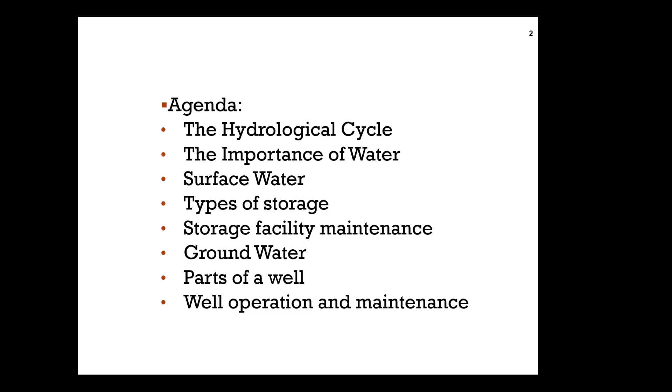And then I have a video as well on that, so hopefully that'll share okay, a short video. Then we'll talk a little bit about the difference between groundwater supplies and surface water supplies. And I'm actually not aware, depending on which system you are working in, whether they are surface water, lakes and reservoirs, streams and creeks, or if it's a well-based groundwater system. So we're going to talk about both as the distribution certification process covers off both, and the different requirements for storing the water and also moving that water from its primary location.

We're going to talk a little bit about primary storage, which is raw water, versus finished water storage, which is treated water moving into a steel tank or a concrete tank, or some of the older tanks were wood stave. Or I've seen some small water systems in BC that actually use children's swimming pools and hot tubs as their reservoir, because when you're pumping from a source, you don't want that well or jet pump to be running all the time, so you pump into storage.

And people have been very creative about using any large vessel as a storage vessel for finished water. The trick is, of course, to make sure that it's safe, that it's disinfected and fit for consumption, and also that it provides the supply that you need, whether it's for domestic or outside use, or potentially for fire protection. So we'll cover that off and then look at parts of a well, how a well operates, and some of the tricks around maintaining that. And again, one eye always on

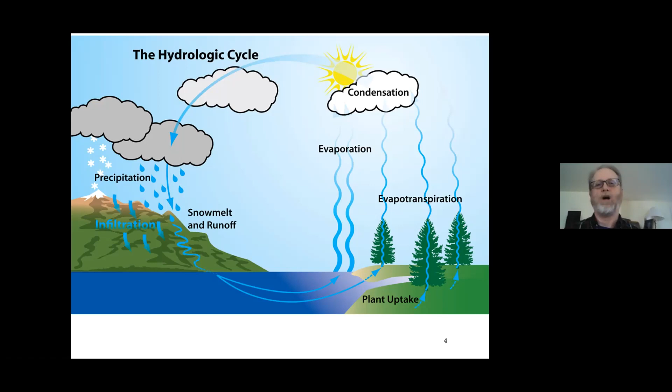When it hits the surface of the earth, it then either can act as runoff through snowmelt or direct from impact onto the earth, runoff on the surface into a source, or it can infiltrate or percolate into the soil and then recharge our groundwater aquifers. So this cycle and these stages of water are always happening. It's either winter in half the world, the northern hemisphere, or vice versa. So the process of water falling back to Earth could be in a solid. The northern hemisphere right now is basically in winter, so that's what we're seeing in a lot of places. And again, we don't get very even distribution of fresh water in our system.

So what we're looking at is a cycle, and the important points to remember: it doesn't have a beginning or an end. It is basically, as they say, a perennial in-motion series of changes to fresh water in our system. And of course, it can take water from saltwater bodies as well and put it back into the atmosphere, either through direct evaporation or through wind action across the top of the bodies of water, and then eventually back to Earth again.

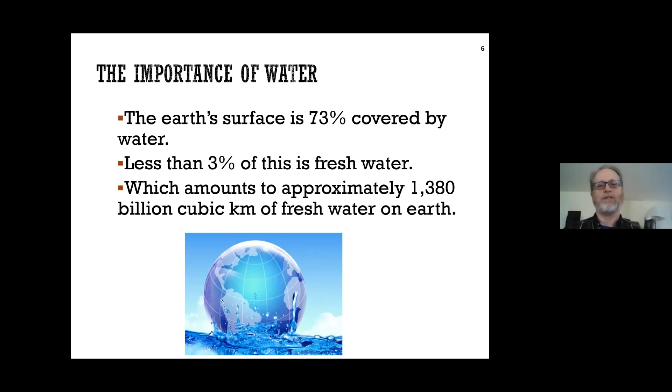So be familiar with the terms, you know, the precipitation, transpiration, infiltration, and so on. Basic facts: 73% of the Earth's surface is water, but less than 3% of that is fresh water. And of course, that's a fixed amount. And as you know, and are probably keenly aware of in some of your water systems, not necessarily fairly or equitably distributed.

In North America, and it'd be interesting to compare that with your associations to see where consumption is. But BC, the province I live in, has one of the highest per capita water uses of over 375. It's actually gone down. About 5 years ago, it was well over 400 liters per person every day. Now, they're not drinking that much water, but when you break down where water use is happening in BC,

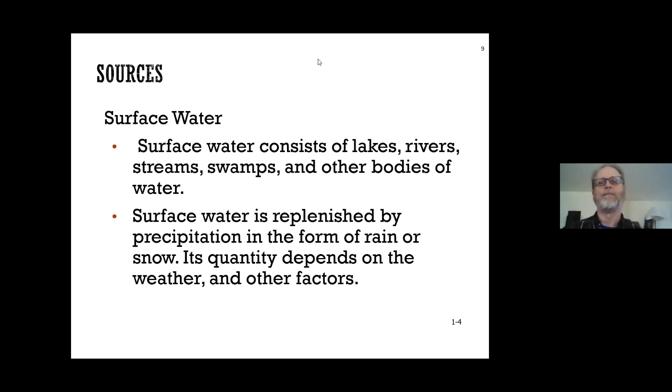And I think this is a good time to show, I've got a short video on the hydrological cycle. So let's try and show you that. Let's just tee it up, make sure it's ready to go. Yeah, this is from one of the environmental sciences groups. So let's try that, and hopefully it will work; holler or send me something through chat if you can't hear this properly.

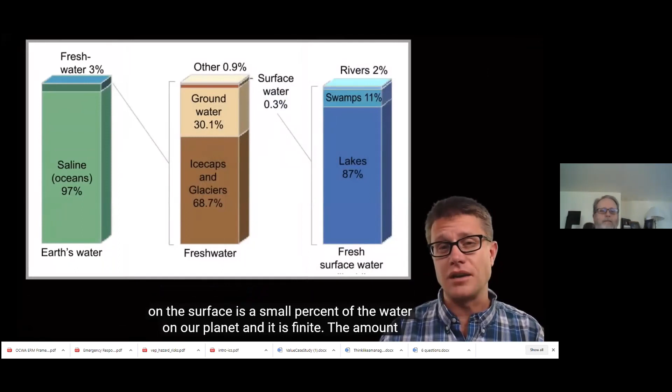Hi, it's Mr. Anderson, and this is Environmental Science Video 5. It's on water resources. Our body is filled with over 60% water, and this doesn't seem like a big deal because the Earth is covered with over 70% water. The problem with that is that most of that is seawater that we can't use. And the fresh water that remains, most of it's going to be frozen in ice caps and glaciers. And so the percent that is really fresh water on the surface is a small percent of the water on our planet, and it's finite. The amount of water we have on our planet has never changed. Now, as the sun provides energy to the earth, the water will move around through the hydrologic or the water cycle, but we have a finite amount of water, and most of it is going to be seawater. We have a little bit of fresh water. The seawater moves around through ocean currents.

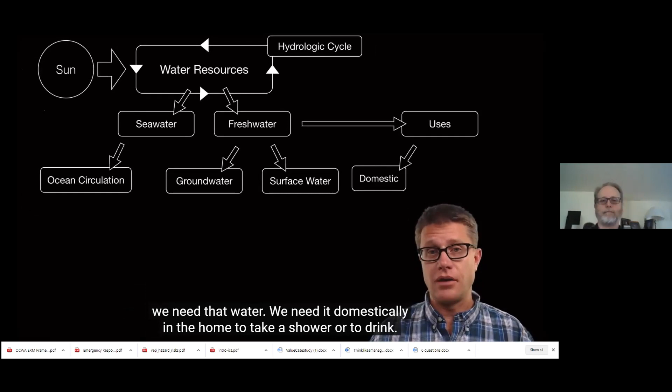The fresh water could be divided into groundwater, water underneath the surface, and then surface water, which is on the surface. Now, we need that water. We need it domestically in the home to take a shower or to drink, but we also need it in industry to make our goods, and most of it actually goes to agriculture to make the food that we eat.

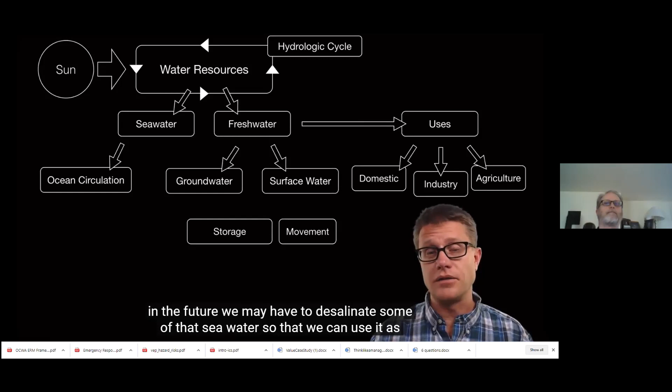The problem with water on our planet is that it's unevenly distributed. In some areas there's lots of water, in some areas, however, there's going to be scarcity. And so humans have had to learn how to store water, move it around, and in the future we may have to desalinate some of that seawater so that we can use it as fresh water.

Now, where is that groundwater stored? It's underneath the ground in aquifers that we can deplete. What about the surface water? Well, it can be stored in reservoirs that occur naturally or ones that are created as we produce dams. And then we can move it around through aqueducts and even to the plant itself through irrigation.

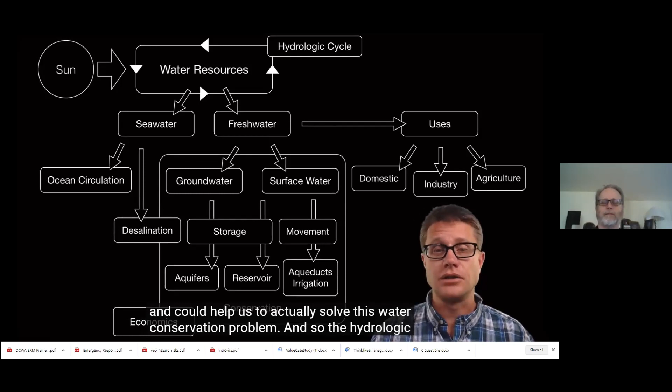But we have a finite amount, and so conservation is incredibly important, and economics have contributed to water loss and could help us to actually solve this water conservation problem. And so the hydrologic cycle works like this. Anywhere there's water on the surface, we can have evaporation. That gets cooled and eventually leads to condensation and precipitation.

Once it's on the surface, we call that surface water. It's running over the surface. That could be lakes and swamps and rivers. After we have that water hit the ground, it can, however, be infiltrated into the soil and the ground itself.

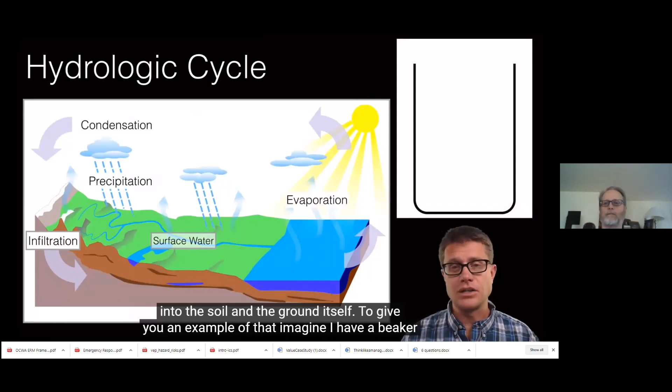To give you an example of that, imagine I've got a beaker here. Is it full? Well, maybe full of air. If I put marbles in it, is it full? No, you can still see there's spaces in it. What if I fill it up with sand? Is it full? No, there's still spaces in there. If I fill it up with water, now we're starting to fill up that beaker. And that's what infiltration is.

As the water flows down into the soil, we call that now groundwater. Let's say it's not filling that whole beaker, it's right here. That point at which we have saturation in the groundwater is called the water table.

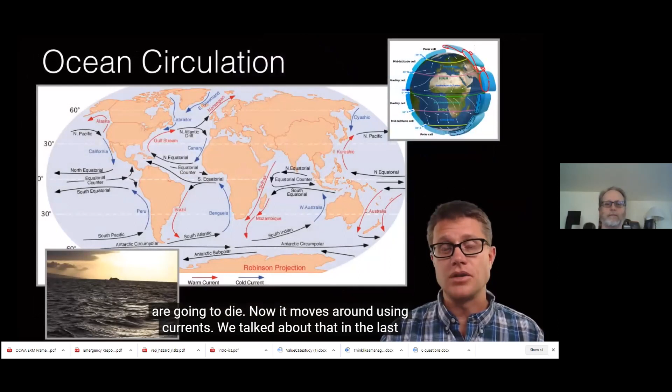Most of our planet is covered with water. Unfortunately, it's seawater. It has salt dissolved in it. If you drink it, you'll die. If we put it on our fields, the crops are going to die. Now, it moves around using currents. We talked about that in the last video on the atmosphere. It's cells in the atmosphere and the Coriolis effect.

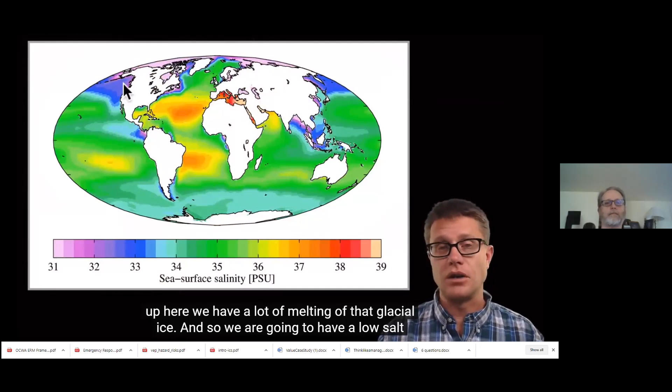So we have these general trends in circulation, but also salinity affects it. And so if we look at an area right here, it's a high salt concentration because we have a lot of evaporation. But up here, we have a lot of melting of that glacial ice, and so we're going to have a low salt concentration. And so the salt concentration and differences in heat create this thermohaline circulation that really makes that whole ocean on our planet one system.

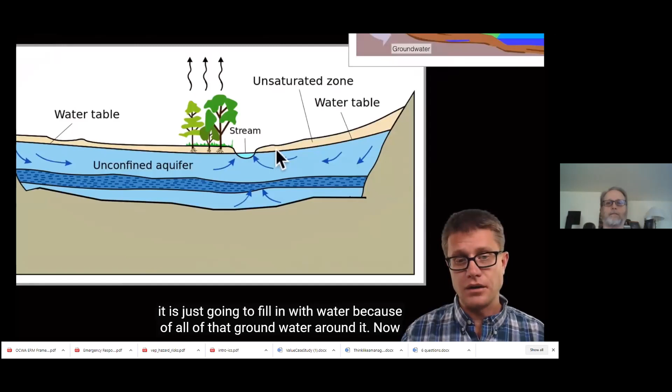Now, if we look at fresh water, it can be divided into water that is above the surface, we call that surface water, and then groundwater. But what's interesting is if we look to the sides of that stream, you can see the water table in the groundwater. And so if you dig a hole right here, it's just going to fill in with water because of all that groundwater around it.

Now, this is an aquifer. It's storage of that water in the groundwater. We call this an unconfined aquifer because the water can move between the surface and the aquifer itself. So this is on every certification exam, to be able to define an unconfined aquifer as opposed to an aquifer that's confined by the composition of the soil.

But it's a good cross-section of seeing where the water table, or that top water level, is in our groundwater supply and how it can turn into surface water based on the contours and configurations and elevation changes. If I were to dig down a little bit, we could find what's called a confined aquifer, and that's going to be stuck between this impermeable rock down here and above it.

Now, let's say we want to get to that groundwater on the surface. If we want some of the surface water, we simply pump it out of the stream, but if we want to get it out of that groundwater, we could dig a well. Now we could either pump out the water, or sometimes we'll have what's called an artesian well, where there's either enough gravity above it or enough pressure in the groundwater so it actually comes out.

But as we use that well, just like using a stream, the water table is going to drop, and so we're going to start to deplete that aquifer. Now, an important term in filling an aquifer is something called recharge. So as we get water and infiltration, we're going to fill up that aquifer, but if the outputs, in other words, if we pull out more water than we're putting in, we're going to deplete the aquifer.

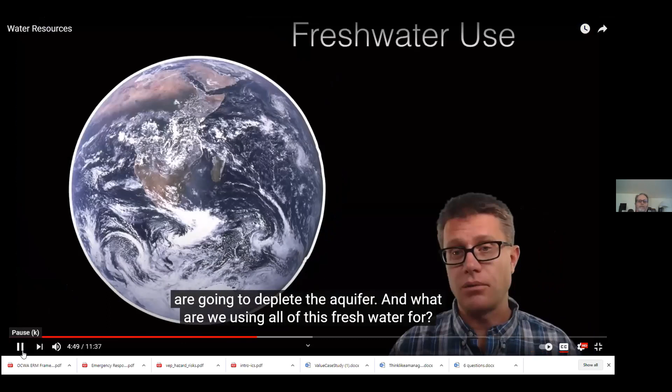And what are we using all this fresh water for? Well, if we break it out using a pie chart, most of it is actually for agriculture, the growing of our food. We use some of it for industry, and then some of it domestically in the house. The problem, again, is that it's unevenly distributed on our planet. Brazil's going to have plenty of water, but if we look in the desert southwest of the US or in the Sahara, there's not going to be any water right there.

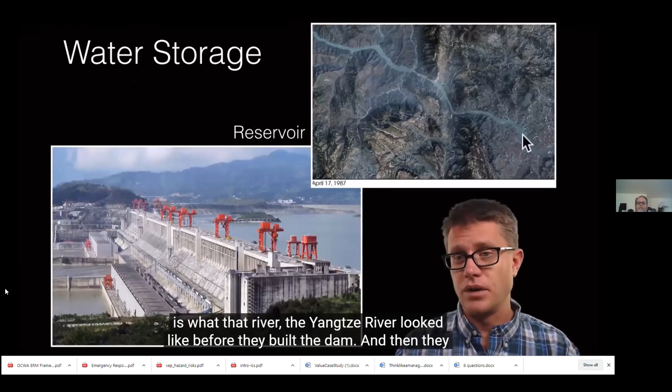And so what have humans done? We've started to store water. So reservoirs are an example of that. A big example would be the Three Gorges Dam that was built in China, finished in 2006. And so this is what that river, the Yangtze River, looked like before they built the dam. And then they built the dam, it finished in 2006. You can see what it looks like then. So we're storing the water behind the dam.

What's nice about that? Now we have water that we can use at will. We also can get energy from it as we run that water through a generator. We can control flooding downstream, and also we can use that for irrigation, or at the Three Gorges Dam they're using it to increase shipping on the Yangtze River. So it sounds great. What's the problem?

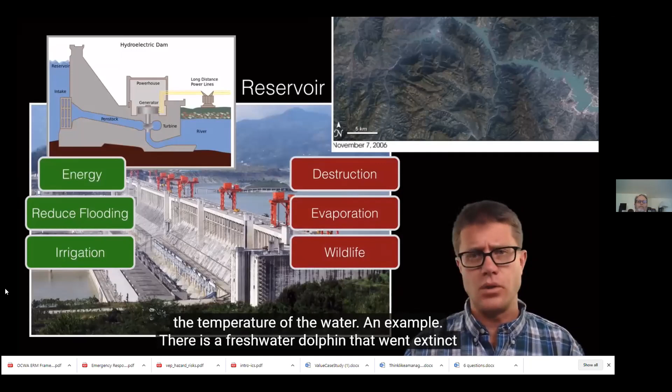Well, there's going to be destruction wherever that water went. So we're decreasing 20% of the forest in this Yangtze River. We're displacing over 1 million people that used to live there. We also have evaporation of the water off the surface, and then we're going to have nutrients that start to deposit there that would have normally moved their way down the river, and that's going to disrupt wildlife. And so fish obviously can't spawn, move up and down in the stream, but it's also going to change the temperature of the water. For example, there's a freshwater dolphin that went extinct in the Yangtze River, and the Three Gorges Dam may have contributed to that.

We can also store it underground. That's naturally stored in what are called aquifers. One of the largest ones on the planet is the Ogallala Aquifer. It's going to be found in the Midwest, and so here it is in Nebraska, but it goes all the way down to Texas and up into South Dakota. It's a huge aquifer. So if we look at the amount of water stored underground, it's over 1,000 feet of infiltrated, saturated water underneath the ground that we can use. And you can see right here, there's tons of irrigation going on. This is in Kansas. They're using center pivot irrigation so they can grow their crops.

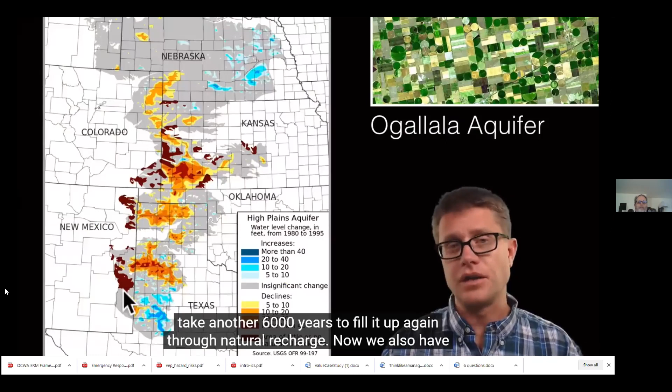Seems great, but what happens again is that we can deplete that. So if we look at this, this is during a 10 or a 15-year period of time. There's an increase in the aquifer in certain areas, but most of the time we're seeing depletion. And sometimes that aquifer has kind of disappeared. And a lot of scientists think in the next 100 years, the Ogallala aquifer is just going to disappear. Why is that a problem? It could take another 6,000 years to fill it up again through natural recharge.

Now we also have to move water around. So looking to California is a great example of that. So if we look in California, they need a lot of water in the Central Valley and then in the south, Los Angeles and San Diego. So they built this huge system where they can move water where it is in the mountains, and they can move it through these aqueducts to where it's needed.

Now you can see that's controversial. So people in this area are saying you're depleting our rivers. In this area, they're saying we have more population, we're growing your food, so we need more of that water. And this conversation becomes more heightened when we move into drought, and California is in an awful drought right now. Drought occurs when you receive way less than the normal amount of water. And so as we use that for agriculture, irrigation movement is super important. So how do we move the water actually to the plant? The easiest way to do that is using furrow irrigation.

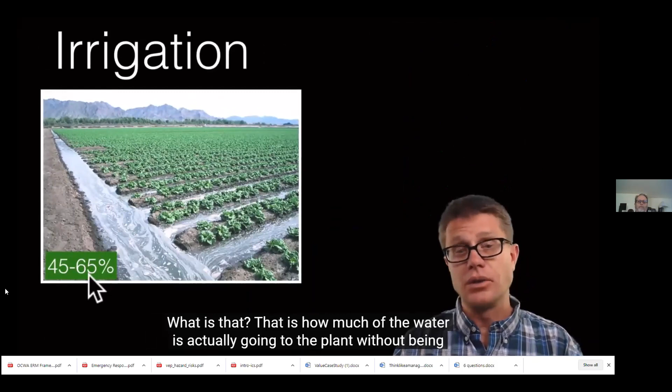You can see it's easy, you just dig a trench. What's the problem? We have efficiency rates of around 60%. What's that? It's how much of the water is actually going to the plant without being evaporated and infiltrated into the soil. So we could move to flood irrigation, higher efficiency, but it's going to damage the plant a lot of the time. We could move towards a spray irrigation, high efficiency, but what are we doing?

You can see we're adding equipment. This is a center pivot, so that costs money. Or we could move to drip irrigation. You can see it's going to be 95% efficient, but it's going to cost the farmer a lot more money to do that kind of irrigation.

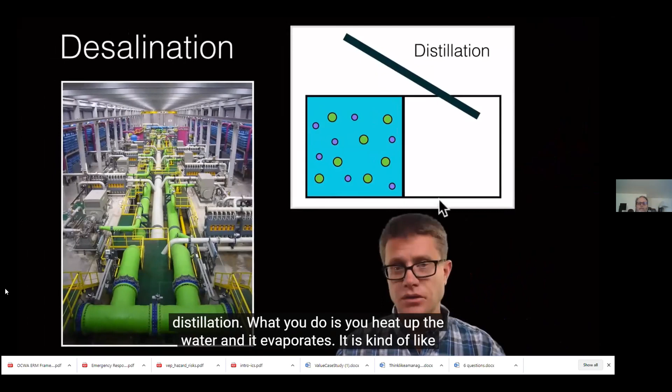As we move into drought situations, desalination becomes an option. We can remove the water from seawater. One way to do this is through distillation. What you do is you heat up the water and it evaporates. It's kind of like the hydrologic cycle. You then cool it down, usually through pipes, and what you do is you remove the water. What's the problem? Costs a huge amount of money.

We could also do that through reverse osmosis. This is a reverse osmosis plant over on the side. What you do is you put a membrane right here, and then we squeeze the water, and as you squeeze the water, you move the water through, but you leave the salts behind. Now we have fresh water. What's the problem? Costs a lot of money.

About 1% of the people on our planet are using water that's created through desalination, but by 2025 we should have 14% of the people on our planet in water scarcity, and so desalination may be an issue. Now how did we get to this problem? It seems like we have an unlimited amount of water, and remember our model that the earth provides the life support for society and the economy on the inside, and so the economy got us to this point. The decisions that we as governments made got us to this point.

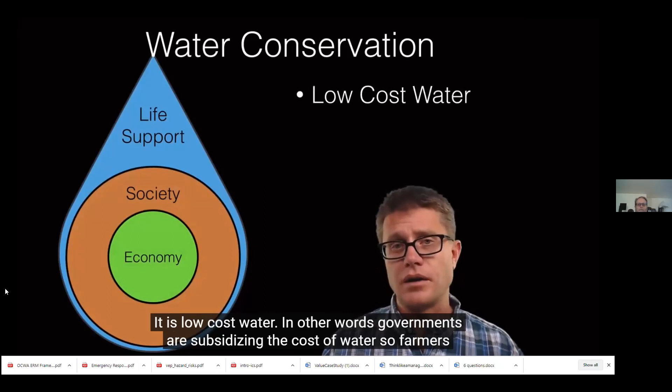Where's the big mistake we made? Well, water doesn't cost enough. It's low-cost water. In other words, governments are subsidizing the cost of water, so farmers and industry and you are not really paying the amount that water costs. And as a result, you're not going to conserve it because it's just pennies on the gallon. It's incredibly cheap. And so how could we solve this problem?

People might not like it, but if we increase the price of water, people are going to start to conserve. And we can also use incentives. In other words, we can pay people, pay farmers, for example, to use irrigation that's going to be more efficient or to conserve water. That's another way that economics can start to solve this problem of water conservation.

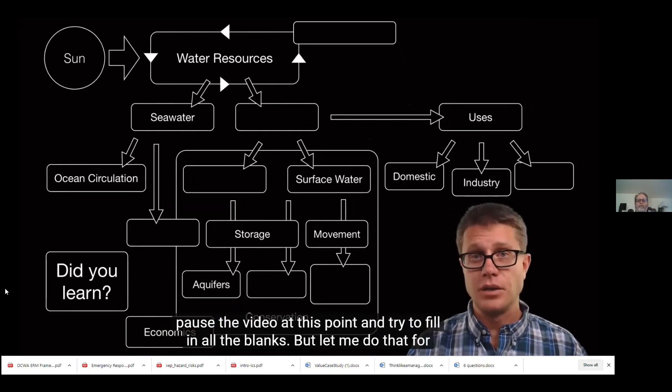And so did you learn the following? I would pause the video at this point and try to fill in all the blanks. But let me do that for you. Remember, the water resources move through the hydrologic cycle. We've got seawater, we've got fresh water. Ocean circulation and desalination could help us solve this problem. The fresh water can be groundwater or surface water.

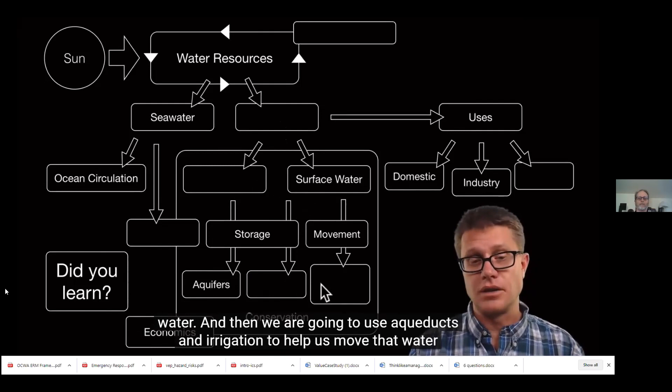We use it for domestic, industry and agriculture. We can store the surface water through reservoirs. Aquifers is groundwater. And then we're going to use aqueducts and irrigation to help us move that water around. But again, conservation is incredibly important. Economics are going to drive that. And I hope that was helpful.

All right. So several of the points that we talked about already in terms of both the hydrologic cycle and how we move the limited resources we have. And it's interesting because California the last couple of years kind of came out of a drought for a while, but in the big picture, of course, the issue is that they've had to change to some different modes of growing crops because some of the crops, especially almonds and avocados, are very water intensive.

So they've changed that. And it's one thing for a government to say, we're going to raise your water rates. In BC, we had a report done by the BC Water and Waste Association a little while ago on the actual cost. Are water utilities charging enough to actually pay for the infrastructure? So never mind the water itself, the product. We're just talking about packaging. And the answer is no. So we're not even charging people enough to upgrade the infrastructure.

And you may have your utilities in similar situations where pipe is aging, pumps, motors, valves need replacement, and there isn't sufficient budget for that. So, of course, metering helps.

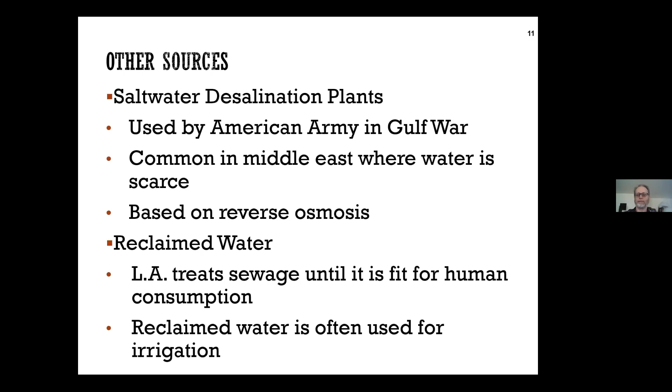With surface runoff, if we're collecting water for our system from the surface, then the things that engineers and system designers have to consider are: when does the water show up? How intense is it? And that intensity is how much water comes in, say, a 30-minute period of a storm. Precipitation happens for 30 minutes.

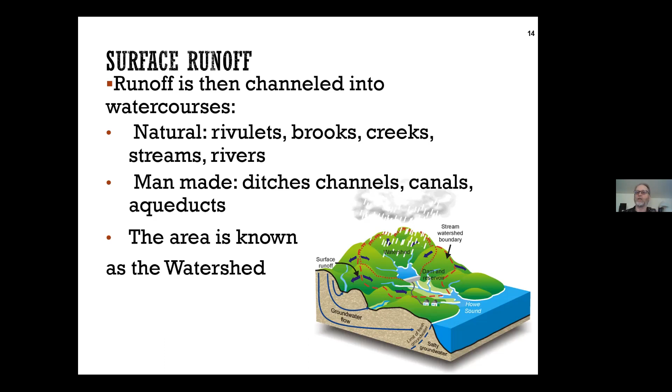So, as systems grow, they adapt to those environments. But it's also about knowing, well, where are the surface water supplies in the first place? So we can use the surface water either to feed natural lakes and ponds, or we build reservoirs. That example in the video of the Three Gorges in China, the dam was built to create what's called an impoundment area, but basically impounded water just means we've locked up a specific volume of water to supply

whatever our needs are. In BC, there's a big dam being built up in the north called Site C, mostly for hydroelectric. But some of the concerns environmentally were, you build a dam on the river and you impound the water behind it, it's going to have an environmental impact. It's going to affect people's livelihoods if they fished or hunted in the area or lived in the area. Affects logging, affects all sorts of things. So usually dams are built with very careful consideration about what the impacts are going to be.

A lot of surface water supplies are also what we call mixed use, that they may be a supply for people's drinking water, but they're also recreational. The biggest recreational lake in BC is a lake called Okanagan Lake, in the southern half of the middle of the province. And all of the communities ringing the lake use that surface water for their drinking water. They either take it from a creek on its way to the lake, or they take it right from an intake that they have built and stuck into the lake itself.

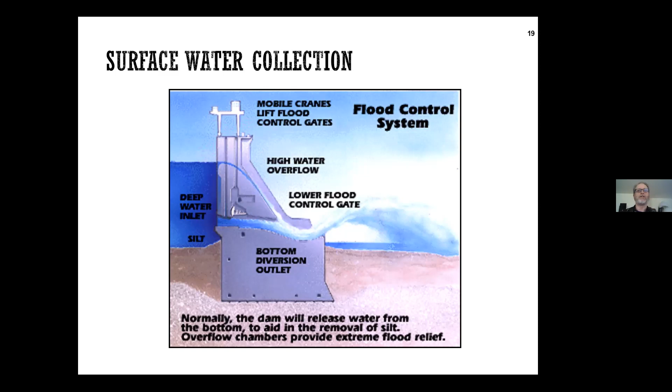And if you like Dwayne "The Rock" Johnson, just watch San Andreas, where he's the superhero guy that protects Los Angeles after the dam breaks because of an earthquake. So these are man-made structures, engineered and designed, but they are still subject to other impacts and maintenance required.

And it doesn't matter whether there's 50 people in the community or 5 million. Their usage patterns for drinking water change seasonally and diurnally, over the course of a 24-hour period. So if all 50 people want to use water at the same time on a cold day, our system might be able to handle that. But what if it's the hottest day of the year? It has to handle that too. And by the way, everyone's got a garden. We need to handle that. And there may be a fire. So how much water will we need in that case?

So all of these are added on factors for saying if we think we need 100 liters of storage, but because of the peak, it's not average over a day. No one uses the average amount of water, right? Our average flow might be 100 liters a day, but in peak, it might be 300 liters. Well, we don't want the pipes to run dry. And a lot of systems around the world face that because of population growth, or lack of carrying capacity of the pipe due to age and corrosion, or leakage, water loss.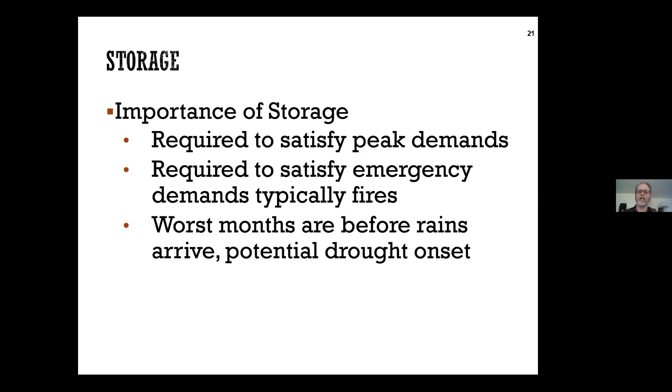So it's about planning for what your community needs. And of course, for a lot of systems, the amount of available storage and water means that's the only service we can provide. So councils will actually say no to certain developments because the engineers have said, we can't have that development in our city, not because we don't want it, but because there's not enough water. So storage is really critical around figuring out how much we need, and building that for the future. We talked a little bit about types of storage that are available, and they may ask you on the exam the difference between primary storage or secondary storage, right?

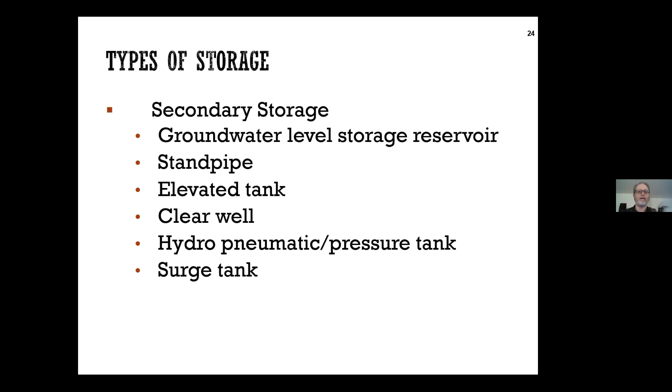We've seen examples earlier of the elevated tank, clear well, hydropneumatic tank, and some of them are very small. Secondary storage can be for just one house. If they have a little well supply, it pumps into a hydropneumatic tank and just supplies what that house needs for a day or two. And then the pump turns back on, pulls more water from the well, fills the tank, and that supplies the needs for that single family. That's secondary storage. There's an example.

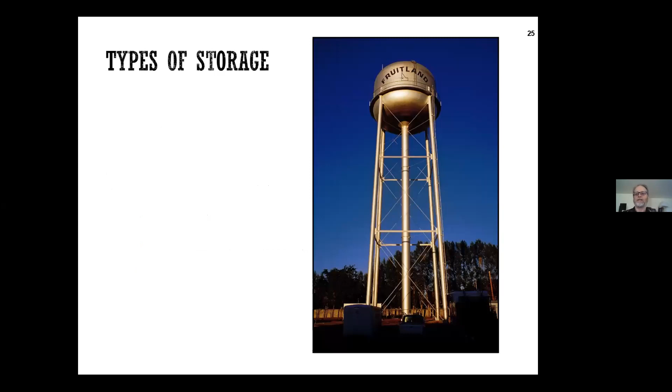A couple of other examples. And remember, an elevated tank is your first clue, because it's elevated, we're also providing energy, right? That's the hydraulic component coming in. And some of the hydropneumatic or pressure tanks can be very small, that basically pull water out of a clear well, which may be used just simply to remove sediment or provide a little contact time. If we're adding chlorine, a clear well can be where that water sits so that it has sufficient time before it gets moved into the system.

All right, so before we get into the types of storage, I've got another little video, if I can get it to work. So let's do that on storage itself. Okay, just a very short video.

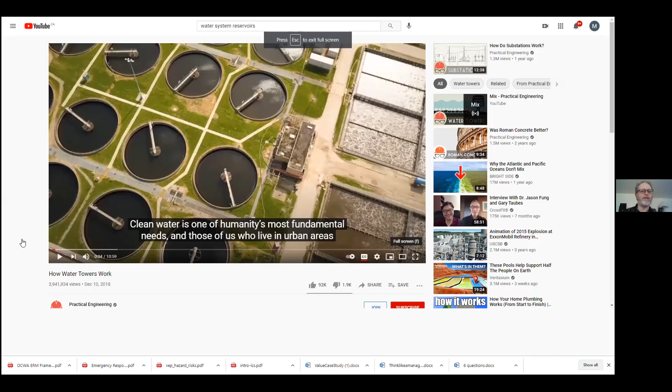Urban areas usually get our water from some kind of centralized public system. Operating a water system is a major responsibility that has implications for public health and safety. In dense urban areas, a clean and abundant supply of water is an absolute necessity, not just for drinking, but also for sanitation and firefighting. And it's not just something we need every so often. Water is a constant necessity, both day and night, on weekends, holidays, and any time in between.

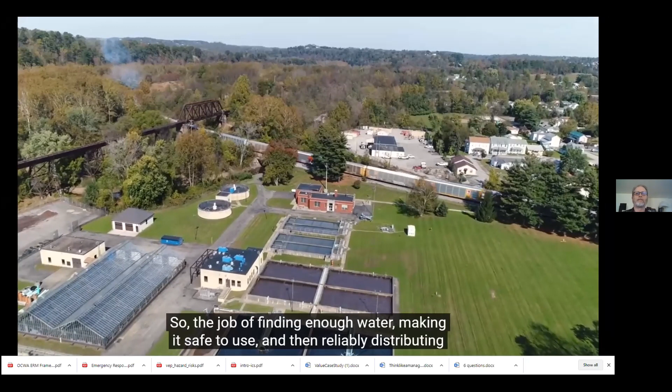So the job of finding enough water, making it safe to use, and then reliably distributing it to the system customers with almost no downtime is a monumental task that requires a lot of infrastructure. And probably the most visible component of a public water system is the elevated storage tank, also known as a water tower. I'm Grady, and this is Practical Engineering, my video series on infrastructure and the human-made world around us.

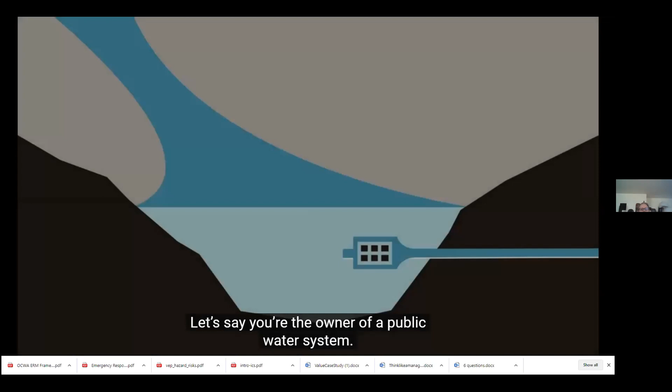More on that later. Let's say you're the owner of a public water system. You found a source of water of sufficient quantity for your customers. You found a way to clean that water so it's safe for them to use. And now it's time to send the water on its way. There are a few ways we can get water from one place to another. One of them is just to carry it there. Whether it's on the back of an animal, or on a truck, or a bottle in your backpack, we still physically carry water all the time. But it's usually not the most efficient way. The first infrastructure dedicated to water conveyance was the open channel.

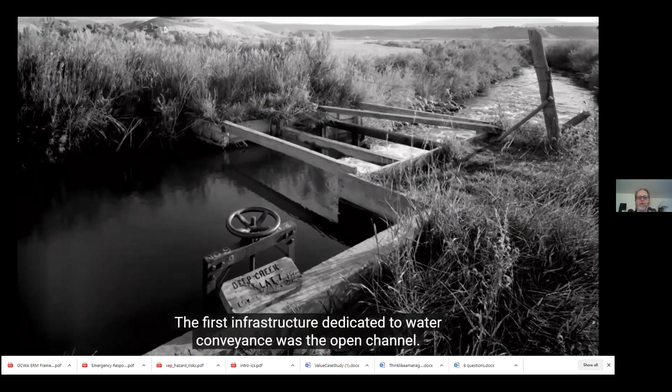Whether in a ditch, canal, or aqueduct, the water is carried by gravity, sometimes over very long distances. We still use open channels to carry water for irrigation and drainage, but they have some disadvantages as well. The water is exposed to pollution and contamination, channels bisect the land, making it difficult to get across, and the water can only flow to areas of lower elevation than where it started.

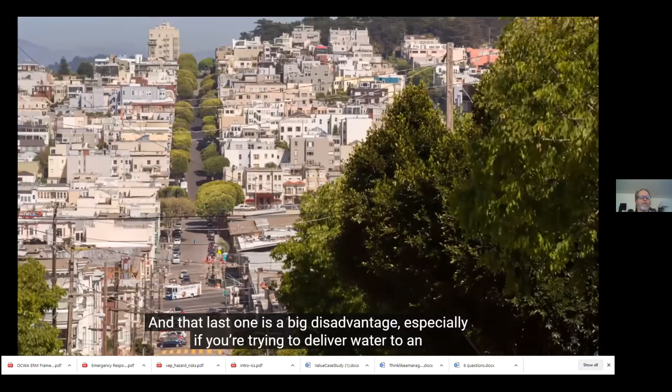And that last one's a big disadvantage, especially if you're trying to deliver water to an area with hills or mountains. So most public water systems today rely on pipes for distribution. Simply putting a top on an open channel allows us to take advantage of pressure to move fluids where we want them to go. Just like electrons in a wire flow from high voltage to low voltage, a fluid in a pipe will flow from high pressure to low pressure.

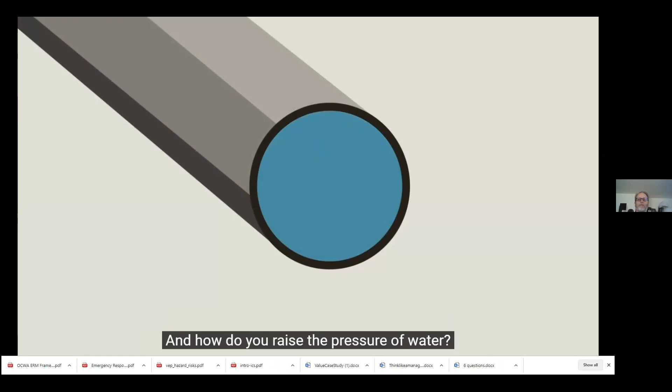So if you raise the pressure at one end of a pipe, you can send your clean water to anywhere you want it to go. And how do you raise the pressure of water? With a pump. A pump is a device that moves fluids. In some cases, a pump literally lifts the fluid to a higher elevation, but in most cases, a pump imparts energy to a fluid by raising its pressure.

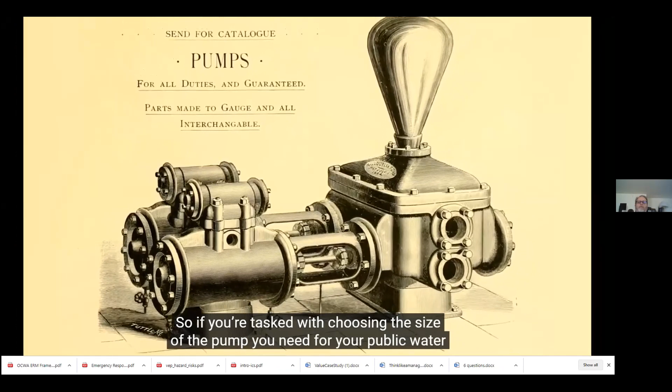And pumps, especially the size of pumps that serve entire cities, are expensive. So if you're tasked with choosing the size of pump that you need for your public water system, what do you do? Maybe you measure the amount of water that a city uses in a given day and select a pump that can match that flow rate. Let's see how that would work.

It's midnight in your city and most of your water customers are asleep. Besides the industrial customers that run 24/7, water demands are minimal, and your pump is having no trouble meeting them. But around 5 a.m., automated sprinkler systems start kicking in. Around 6 a.m., people start waking up, taking showers, brushing their teeth, cooking breakfast, all things that require water. And it doesn't take long before the water demand exceeds the capacity of your pump.

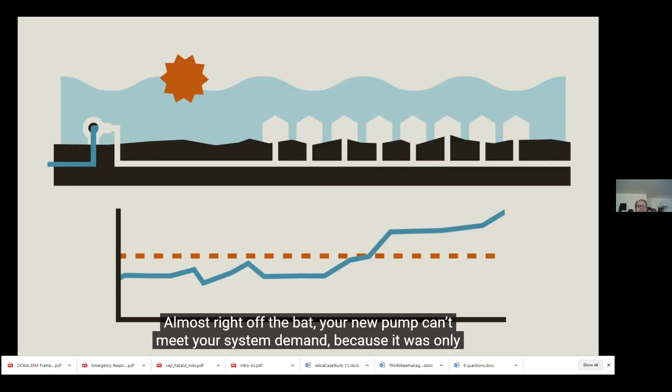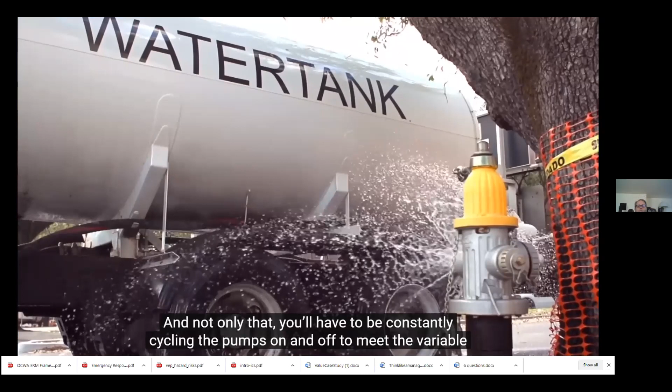Almost right off the bat, your new pump can't meet your system demand because it was only sized for the average. Water demand in large urban areas can vary significantly over the course of a normal day, with the peak hourly demand, usually in the morning or evening, sometimes being as much as 5 times the average daily demand. So if you're trying to meet your customers' water needs using just pumps, instead of just one, you might need as many as 5 pumps, or one huge pump that can do the work of 5. And not only that, you'll have to be constantly cycling the pumps on and off to meet the variable demand, increasing the wear and tear on your equipment.

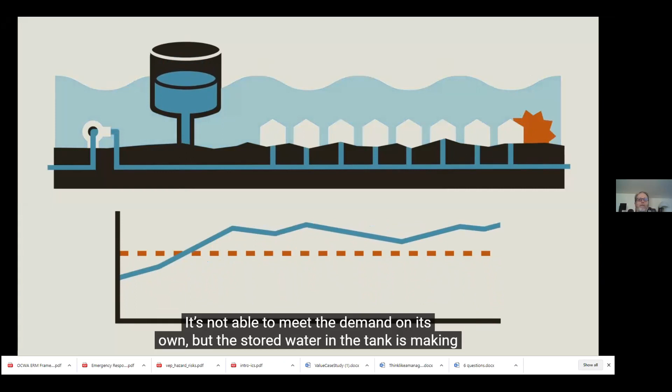And here's where storage comes in. Let's add a water tower to the system and try this experiment again. It's midnight and demand is low, but your pump is running full wide open. Instead of water flowing to customers, it's flowing into your water tower, filling the tank slowly but surely. As morning comes and demand starts to increase, your pump continues running. It's not able to meet the demand on its own, but the stored water in the tank is making up the difference. All your customers are getting the water they need.

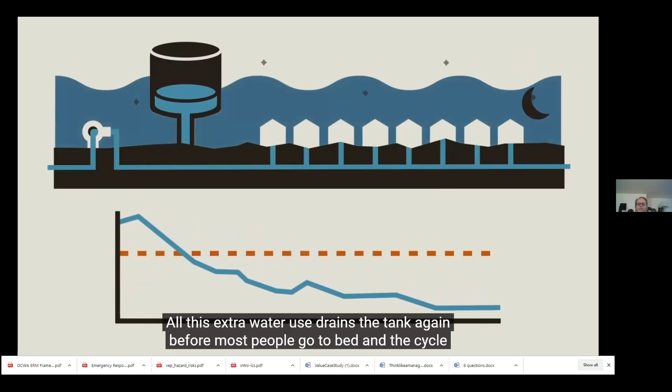As people head off to work, demand again drops below average, but the pump keeps running and the extra flow goes into the tank. Demand again begins to spike as residents of the city start cooking dinner, taking baths, and watering the plants. All this extra water use drains the tank again before most people go to bed and the cycle starts again. It's pretty easy to see how storage makes your water system more efficient.

It smooths out the peaks and valleys of water demand, not just on your pumps, but all your upstream infrastructure, including your water treatment plant and raw water supply. Without storage, all those facilities would need to be sized for peak demand, increasing their cost. With enough storage, pumps and other infrastructure can be sized for average demands, saving not only cost but also complexity, because you don't have to predict changes in demand and respond accordingly.

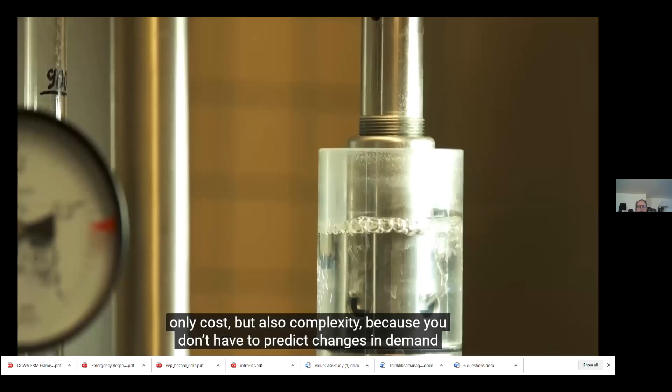Sometimes those peaks and valleys are predictable, but sometimes they're not. Some of the biggest water demands in urban areas are from fires. Without a firefighting force and enough water to supply them, fires can burn out of control in dense urban areas. In fact, many of the deadliest disasters in history were fires in cities before modern water systems. Now most municipalities and building codes have minimum requirements for the amount of water that must be available to firefighters.

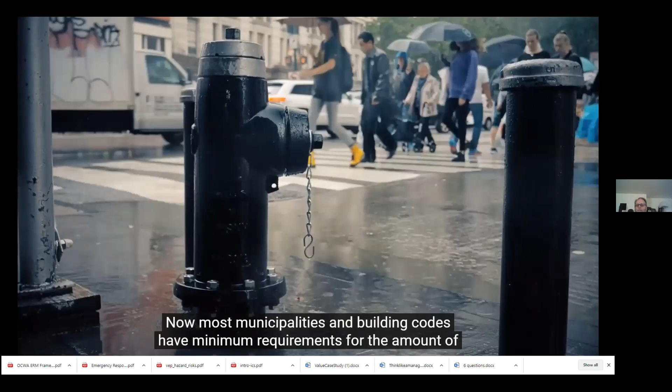And having water stored and ready, like in a water tower, goes a long way to being able to respond to an emergency. You may be thinking, come on Grady, this is nothing new. Storage is the age-old solution to any situation where supply doesn't match the demand. And yeah, it might not be anything remarkable to store water in a big tank, but water towers aren't just big tanks. They're big tanks elevated above the ground.

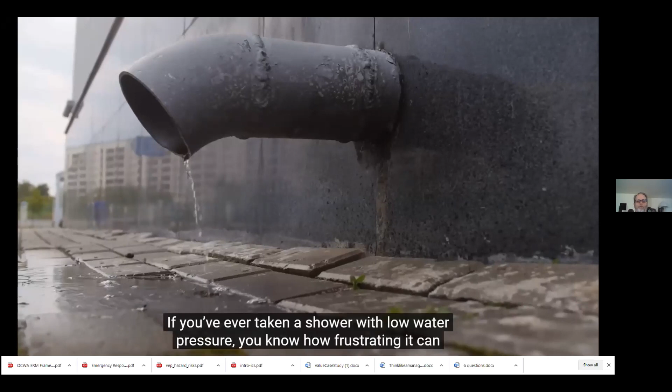And that's because water towers aren't just storing water, they're also storing energy. Water distribution systems rely on pressure to get water where it's going. If you've ever taken a shower with low water pressure, you know how frustrating it can be, because you can't get enough water out of the tap. Pressurizing a water system is also important for public health. Without enough pressure in the pipes, contaminants could make their way into the system through taps or small leaks.

Most water systems get their pressure from pumps, and it takes a lot of energy to maintain this pressure. So having the ability to store not only the water itself, but also the energy that's been imparted to it by pumps is important. In some areas where electricity costs vary based on demand, you can run the pumps at night when electricity is cheap to fill up your water tower, then leave the pumps off during the day when the electricity is more expensive, allowing just the tower to pressurize the system and serve your customers.

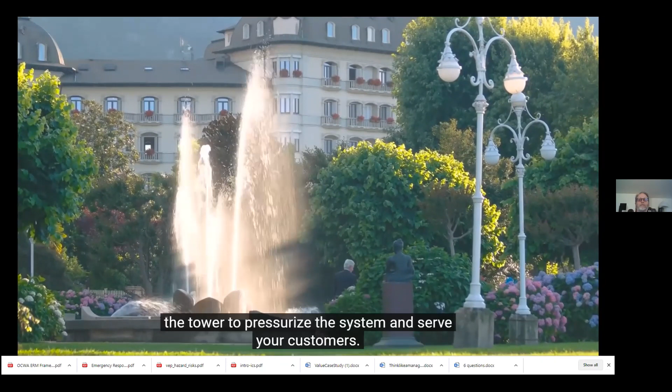Storing energy this way is also carried out at a larger scale to help with electrical grid reliability, but that's a topic for another video. Elevated storage is also beneficial during a power outage by keeping the system pressurized even when the pumps are out of service. But how elevated do they need to be?

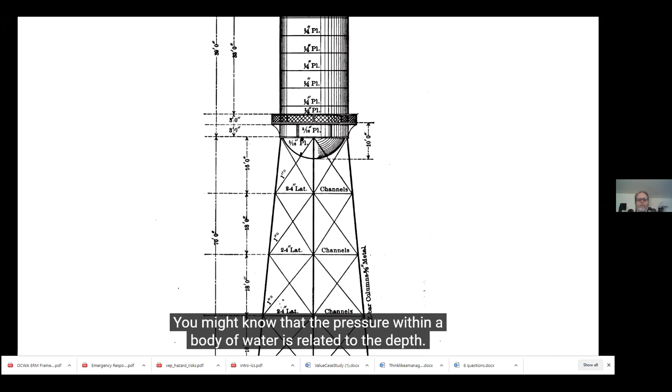You might know that pressure within a body of water is related to the depth. The deeper you go, the greater the pressure. Just like in a pool or the ocean, a water distribution system has this same relationship between depth and pressure. It just happens to be confined within a series of pipes. So you can imagine a water distribution system as a virtual ocean under which we all live, and the water surface in elevated storage tanks represents the surface of the virtual ocean.

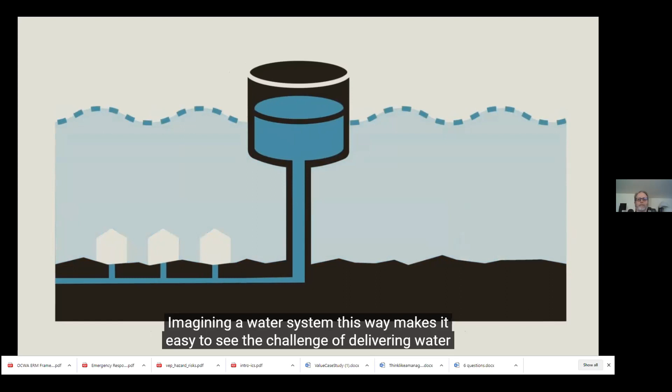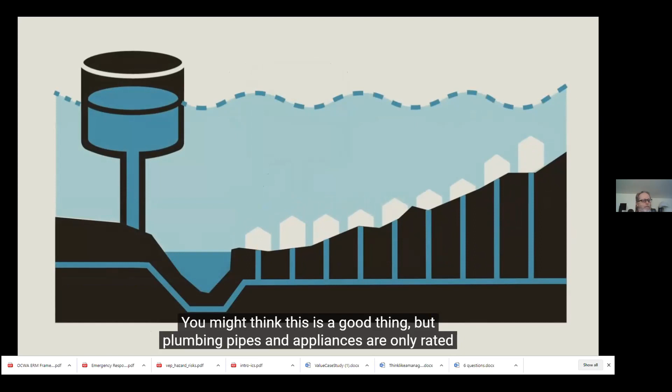Imagining a water system this way makes it easy to see the challenge of delivering water to customers at the right pressure. If our cities were flat, this would be pretty simple. All the buildings would sit at the same depth in the virtual ocean. But most areas have at least some amount of topographic relief. Customers at low elevations are at the bottom of the virtual ocean, where pressures can be too high. You might think this is a good thing, but plumbing pipes and appliances are only rated to certain pressures, so exceeding those ratings can cause serious damage. Sometimes buildings at low elevations will be equipped with special valves to reduce the pressure.

Customers at high elevations will be near the surface of the virtual ocean, having very low water pressure. As I mentioned, this can be not only frustrating, but also lead to contamination of the system. To solve this challenge, many large cities maintain separate distribution systems called pressure zones, each with their own water tower, to serve customers at different elevations within the city.

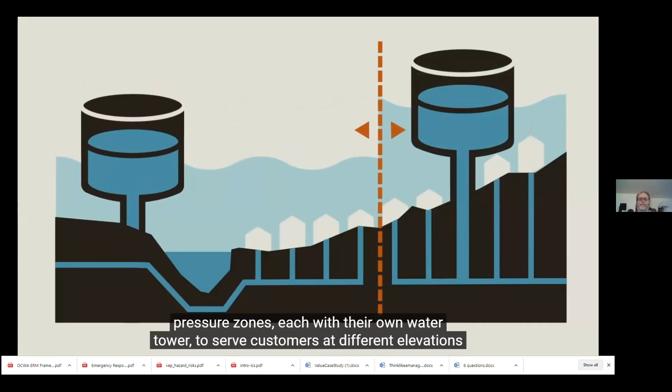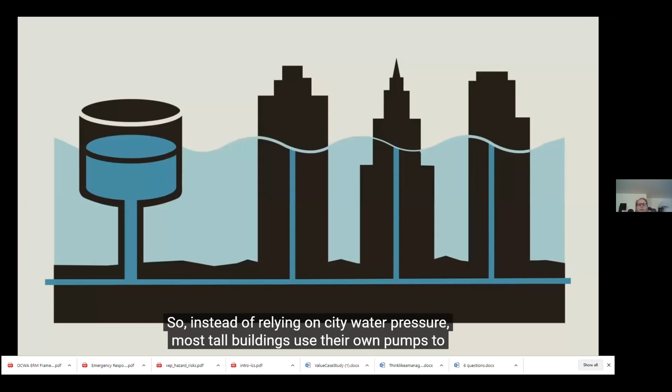But what happens if you need to serve customers at different elevations in the same location? Tall buildings like skyscrapers can have adequate water pressure on the lower floors, while the higher floors can go up near the surface or even above the virtual ocean in the water distribution system. So instead of relying on city water pressure, most tall buildings use their own pumps to provide water to the upper floors. And some cities like New York even require that each building have its own elevated storage tank.

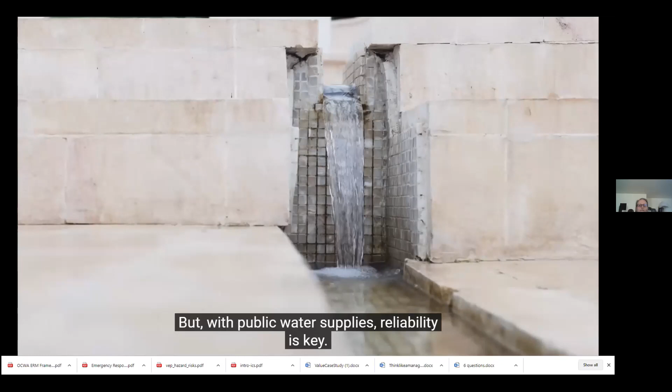Not every city uses water towers. Some have their entire water supply at a higher elevation, minimizing the need to add pressure to the system. And sometimes it just makes more sense to rely on pumps alone to keep the system up and running. After all, water towers aren't cheap. They take up quite a bit of space, and they can allow water to stagnate if it isn't circulated enough. But with public water supplies, reliability is key, and it's been a long time since gravity was knocked offline from a thunderstorm, so elevated storage tanks, in some form or fashion, are definitely here to stay.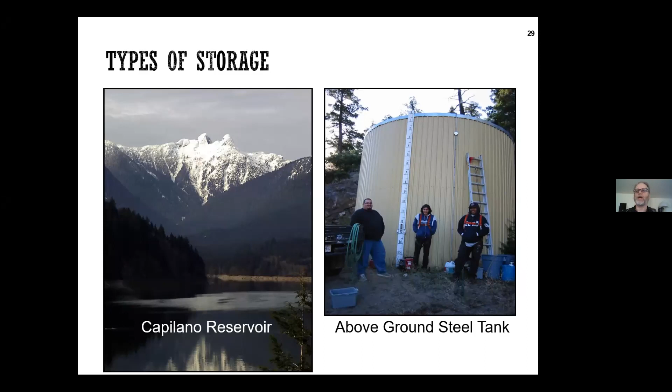So obviously, when we build one of these storage facilities, we have to maintain it, especially since we're talking secondary storage here. So this is water that's already been treated. So remember, in the disinfection discussion, we're talking about that finished water now available. So just as the pipe itself is, most of the time, buried and out of sight, out of mind for people, as long as there's positive pressure in the system, we can't usually have contamination unless we have a backflow or back pressure event. But a facility is the same.

It needs to be inspected regularly to make sure that hatches aren't opened up, that people can't get in or out of the facility, either to do something to the water itself or to create a leak, to do something that would then put that reservoir offline. Happens all the time in North America. The American Water Works Association has very robust standards for both treating the facility, but also for protecting the facility from vandalism. And there's always been a bit of a debate for smaller facilities. Is it better to have a facility in a remote area where there's nobody around? Because then you don't have vandalism regularly, because people have to go a long way out of their way. Or is it better to have the facility right in plain sight?

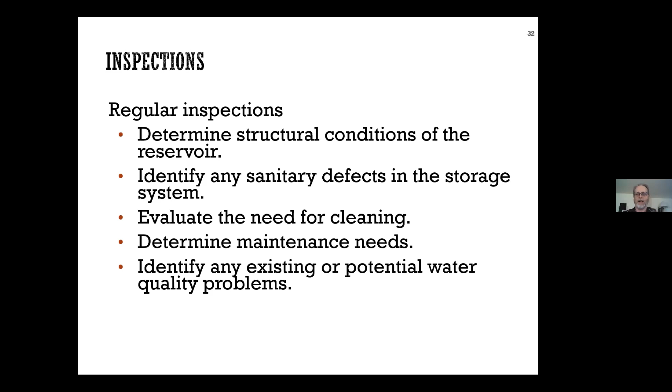The city of White Rock, not far from downtown Vancouver, has one very large concrete finished reservoir. And because of where they took their water from, they didn't disinfect. They didn't feel like they needed to, and their water quality samples bore that out. However, the concrete started to break around one of the vents, so it was a square reservoir, and birds got in and nested on some of the pipe rack that was over top of the water. And you know, if a bird sits still long enough, you know what it's going to do.

So all of a sudden, the city had E. coli samples showing up, bacteriological contamination. And because they weren't disinfecting with chlorine, there was no residual to actually meet that demand of bacteria. So they had to shut down the water system and find the problem. A lot of it was just age, but they hadn't inspected often enough, right? The reservoir's been there for 25 years and nothing's ever gone wrong. Well, it's the same as if you don't fix your fence after 25 years, it'll fall down all by itself.

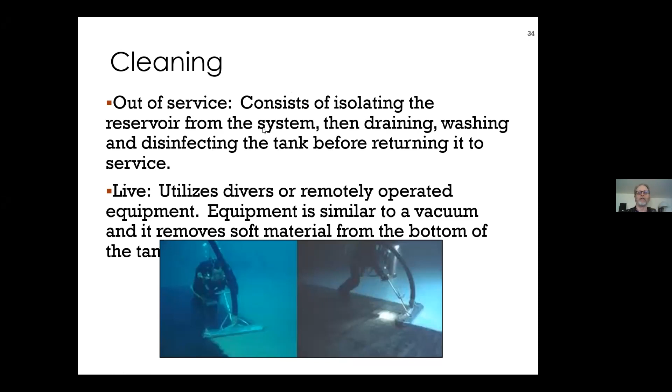Okay, so remember, when we're dealing with storage, we're dealing with part of the live distribution system. So your policies around cleaning the tank will vary based on what the tank is made out of, the quality of the water that goes in, that sort of thing. So if you take the reservoir out of service, you can drain the water. Usually, to save water, cities will drain the water and then do other things with it, like flushing or scouring other pipelines. But it needs to be disinfected before putting back into service.

You won't have to do this on the exam, but just know that the American Water Works Association has disinfection procedures for reservoirs just like they do for pipe. And remember, with disinfection and chlorine, the higher the concentration, the shorter the contact time. So this standard one is basically filling 5% of the tank at 50 milligrams per liter or parts per million, waiting 6 hours, and then don't dump the water, fill the tank.

And if you've done your math right, 5% of the volume at 50 ppm, when you add more water without adding more chlorine, it dilutes so that when the tank is completely full, it's got about 2 to 2.5 ppm or milligrams per liter. Now you can wait for 24 hours.

And think about it this way. You've got a steel tank. You've been inside the tank, brushing it down or using a pressure washer on it, or just sweeping out the bottom of the tank. Some utilities just go in there with a shovel and a broom and remove the sediment. But the extra chlorine on the bottom 5% of storage allows for a very detailed, intense clean in that 6 hours. And then when it fills, you have the regular 2.5 ppm for making contact with the rest of the walls.

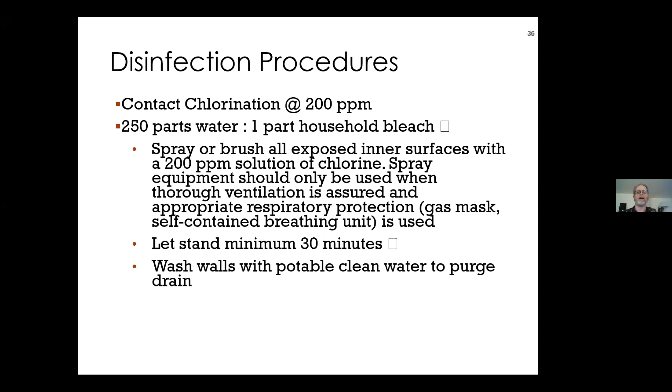The other option is that you do a much stronger dosage of 200 parts per million, spray all of those surfaces on the inside, taking all the safety precautions, of course. Now you only need to let it stand 30 minutes. It's just soaking all the exposed surfaces. That's ladders and inlet pipes and any manifolds that might be in there, and the walls and the floor. Wash them, and then after 30 minutes, purge it, drain it, and now you can fill.

But in both cases, you do need to sample, right? You can't put any part of the distribution system back into service without sampling first.

The other thing you may do, depending on the size of the reservoir and how often it turns over, is in your system, set it up for regular sampling. So it could be weekly or monthly, depending on the size of the reservoir. And provided that you've blocked off cracks, and you have proper locks on your hatches, and you do the cleaning once every 3 to 5 years, depending on the water quality, now you have a check, maybe every 3 months, every month, depending on your water quality, to know that the

reservoir is safe. The other thing about a steel tank especially is they corrode. So the AWWA will talk about the right types of coatings. So you always have the ability to find a supplier that can deliver not just house paint or fence paint, but the right paint for that surface, so that you minimize the corrosion. And in this part of the world, the water quality is good, but it is quite corrosive. So there needs to be some sort of coating to prevent that oxidation, that oxidizing of the exposed steel on the water supply.

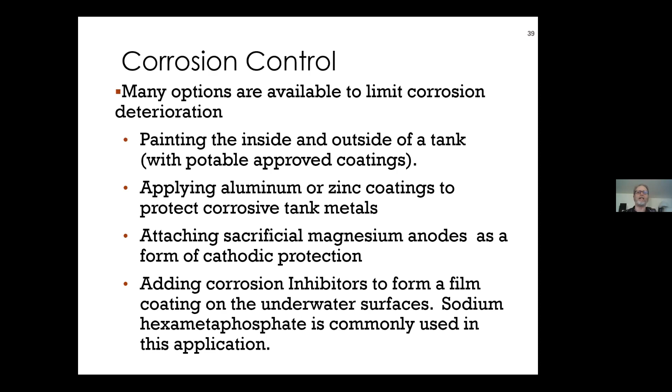So many different options, but again, in your system, know that. We'll talk a little bit more about cathodic protection, that's down in the middle bullet here, the way of protecting the metal, either on a valve or a service connection or the main itself, by basically sacrificing another metal, typically zinc or magnesium, so that it'll get corroded before your pipe or your reservoir. So that's another way of doing it. The most common is just paint it. Use the proper paint, and then inspect it from time to time to make sure that that paint is in

good condition. Freezing could be a potential issue, probably not in your part of the world. This part of the world, for sure. And that's typically in the level controls, in the hatches, and the metal assemblies. And so it's really important that again, that reservoir be inspected regularly.

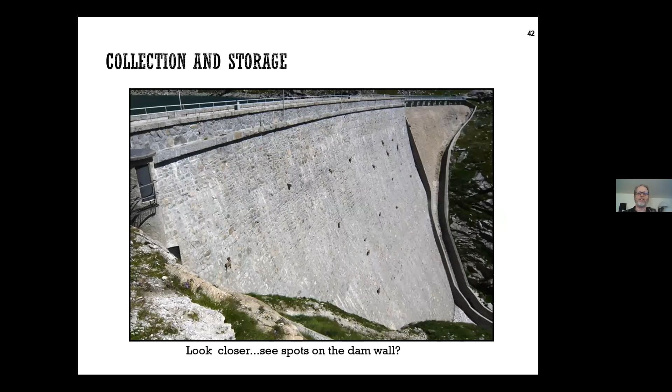Here's an example of a primary storage. I don't know if you can see that video. You see the spots on the walls of the video, or on the dam. That's pretty steep. They're actually goats. They actually climb up there to eat the moss off the walls. Not necessarily a water quality concern at that side of the dam, but not what most operators would consider that they have to deal with. The European ibex, they're good climbers, obviously.

All right. So that video that I showed you really talks about building storage based on what your system needs and determining the demand over a 24-hour period, seasonally, and based on the population. Of course, our cities tend to grow, our towns grow. In your area and parts of BC, where there are lots of people coming at certain times of the year for recreation and tourism, the water system has to be built for that, even though those people don't live and pay taxes there. But they show up for a while, 2 weeks or a month or 10 days, and use a lot of water. So we still have to size our system accordingly, and storage can help with that. So we're really looking at properly maintaining our system for all of those aspects.

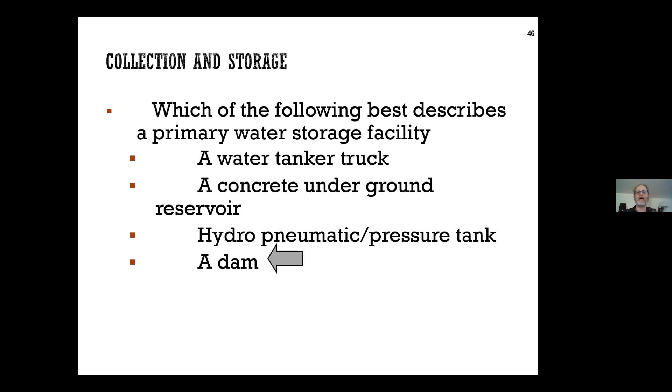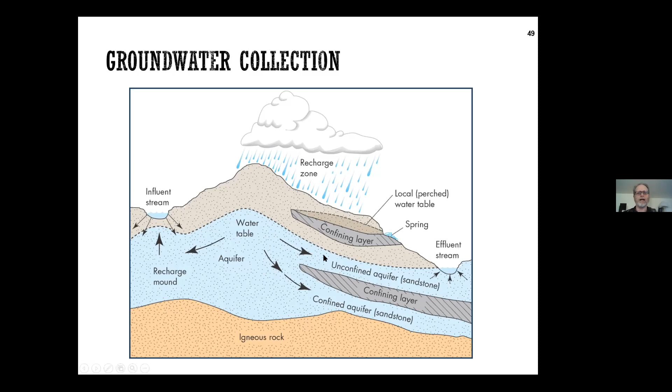But in most parts of the world, the ground itself that is suitable for an aquifer doesn't collapse when water is removed. And it's based on the type of rock and soil, the porosity, which is the size of the pores, could be sand, silica, topsoil, etc. The characteristic, as it says, the permeability of the soil and rock is what allows the aquifer to either be exploited by us or used, or if it's something that we have to develop further before we can take water out of it.

Here's a cutaway of a groundwater system with different types of soil. This is the expanded view, the exploded view. So we have vegetation, topsoil, water moves through and creates a groundwater aquifer. So obviously we search for these if we need to use the water supply. What we want as a suitable aquifer is that there's sufficient enough volume to do what we need it to do, that it's permeable. In other words, water can move through it. And that may be on the exam, just to be able to define permeability.

And that when we take water out, it can be refilled or recharged, right? The recharge area is where that water lands and moves through the ground to recreate and replenish the aquifer. And of course, we then determine what the yield is on our well. We actually drill it and then start pumping water out. And then when we turn the pump off, how quickly does that area recover? So these are the key areas, right? Volume is sufficient, permeability, and that it's recharged. Because if you have to go to the expense of drilling a well once and then the water's gone, then not a good return.

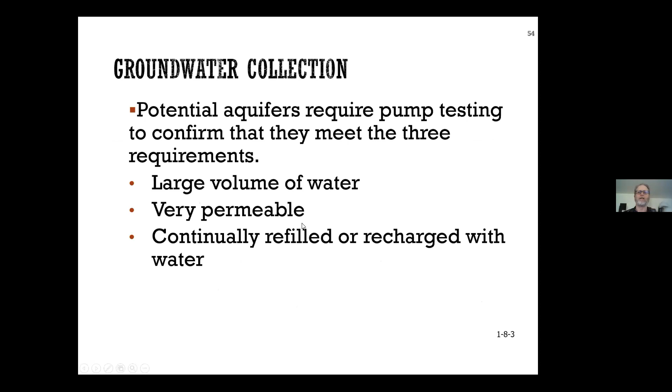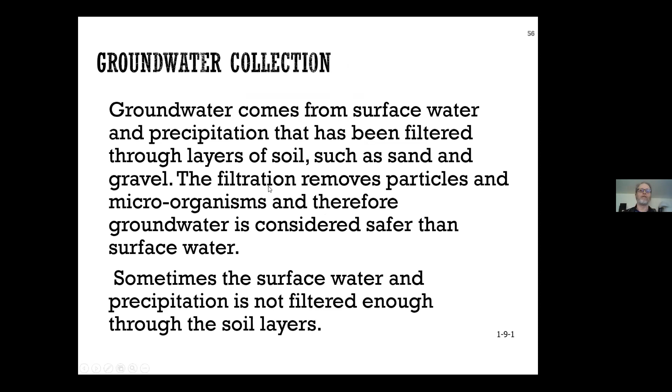So basically when we're looking at groundwater as a supply, the interesting thing is because it's being filtered, it's typically bacteriologically safer than surface water because the soil and particulates themselves have removed some of the microorganisms if there's a deep enough aquifer to do that. If there's not, if the aquifer is filled up so quickly by surface water, that becomes something we could define under our regulations as GUDI, groundwater under direct influence, which means that it may have bacteria. A lot of deep wells, that's not the issue. The issue might be things like magnesium or manganese or copper or iron, but not bacteria.

Well, if we have shallow wells, it's possible that they are acting really like, whoops, that's the last slide, surface water. And that may or may not be a good thing. So we want to make sure that we treat our well supplies in that fashion.

I wanted to share with you your homework. So let me see if I can find that, and we can just finish up the last 10 minutes with that. That way you get a head start. Let's see.

So those were the highlights of that.

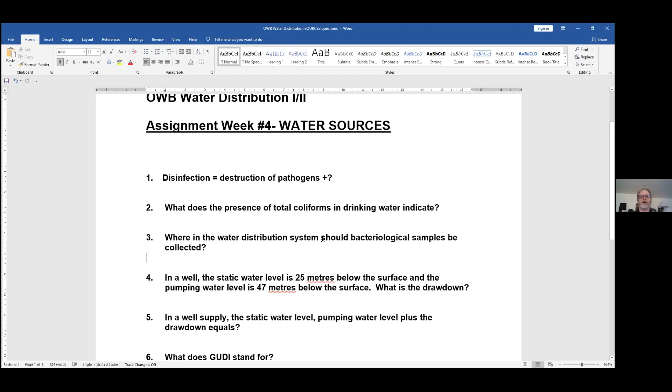All right, so think about your own system, the treated water system, and where would you take samples from? Well, they need to be taken from places where people are actually using the water. So it could be a reservoir, it could be at the outlet side of a well, or it could be in a block that could be a randomized sample or a representative sample of what our water system is like.

So in a well, this is the water table question. So these math, we talked about that a little bit before. Static water level is 25 meters below the surface, and the pumping water level is 47. What is the drawdown? So I'm not going to give you the answer, but think about a cutaway view of a well with the water table at 25 meters and the pumping level at 47 meters. It'll be the difference between the two. So I kind of did give you the answer.

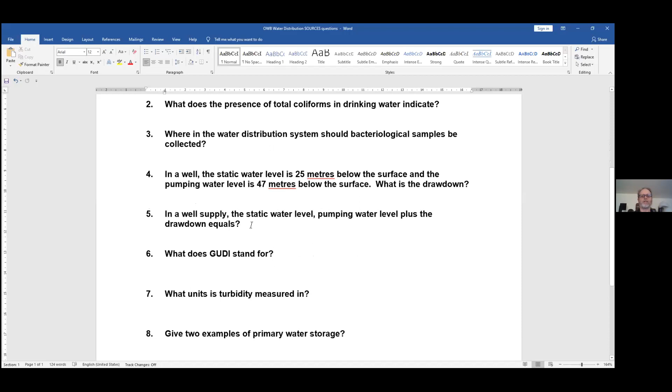So in a well supply, static water level, pumping water level, plus the drawdown equals, we're looking here, basic yield, right? How much comes out of the well. GUDI, we've just talked about in the slideshow, groundwater under direct influence. What units is turbidity measured in? We talked about that during the treatment and disinfection, right? So make sure you're comfortable with that. You don't have to necessarily spell it out, but definitely know what the initials are, right?

The NTUs. Primary water storage, we just talked about today, 2 examples. And we're going to talk some more about water sampling. And when we're doing bacteriological samples, we put sodium thiosulfate in the bottle for a specific reason. I know you know this, so we'll let you figure that out. And then, of course, what's an aquifer? So those are the sample questions.

Next week, after we talk about water sources, we're going into the actual operation and maintenance of the system. So we're going to spend a couple of weeks looking at that before we get into pumps and motors. And we may end up talking a little bit about, I'll talk to Ignatius first about that, how much of the safety stuff. We can talk about the types of safety questions that are on the exam, but really we want to make sure it's relevant for you.